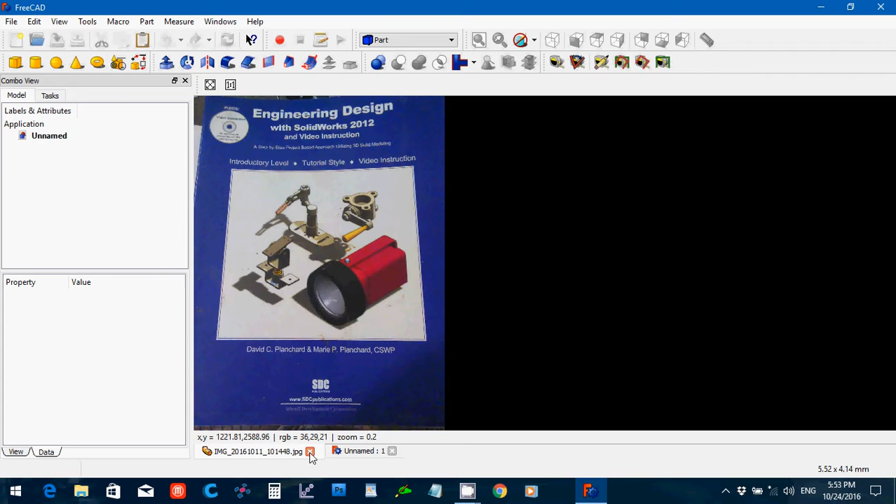In this part of the exercise, part 2, we're going to create the rod. I made a small change to it due to a small change I made to the plate in part 1. So I'm going to start off by going over to part design. I'm going to create a sketch on the XZ plane, say OK.

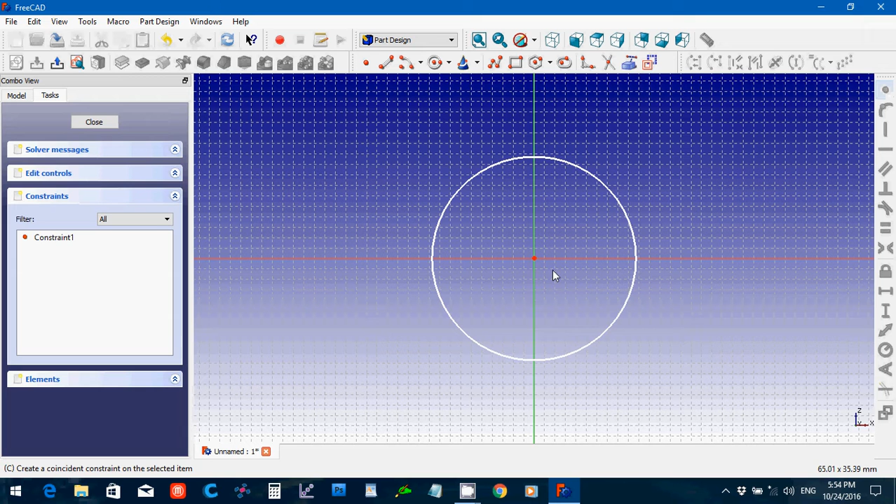I'm going to start off by just creating a circle. Zoom in. I want to make sure that circle is right on the origin. We're going to set the radius here to 5, say OK, and we're going to close that.

We're going to pad that. It's going to be 99 millimeters, because the original dimension was 100, but I'm going to be adding a 1 millimeter part to the other end. So 99, say OK.

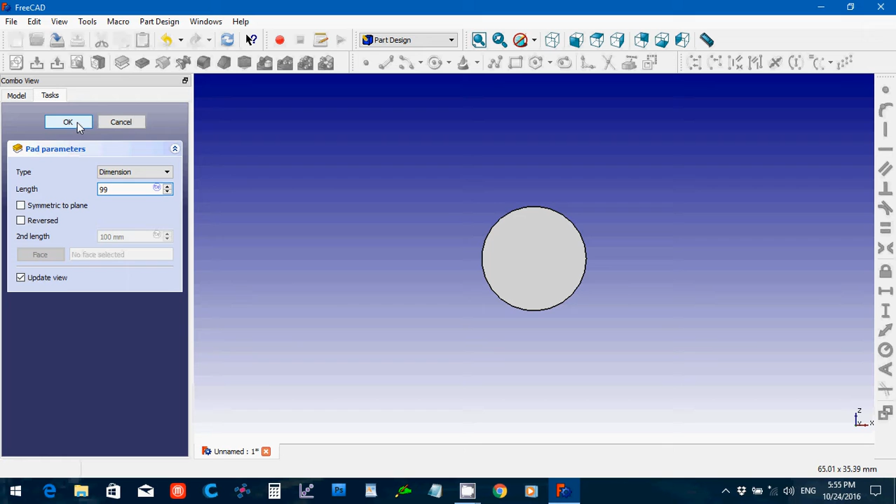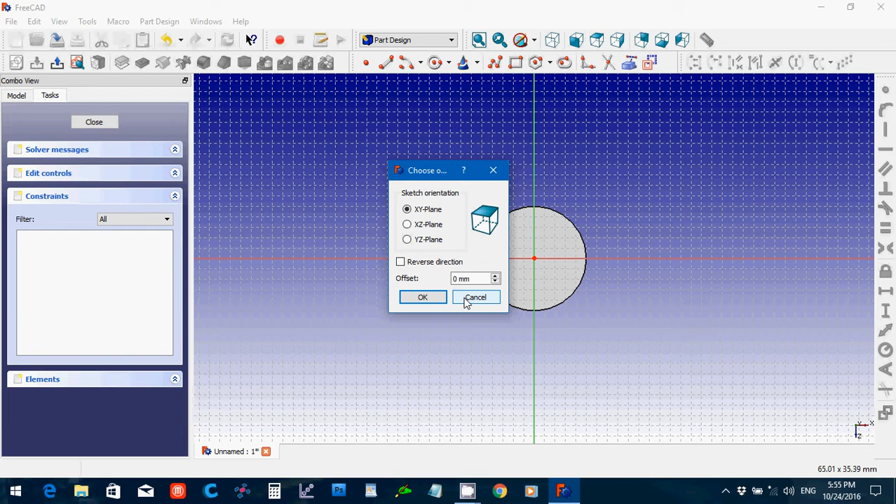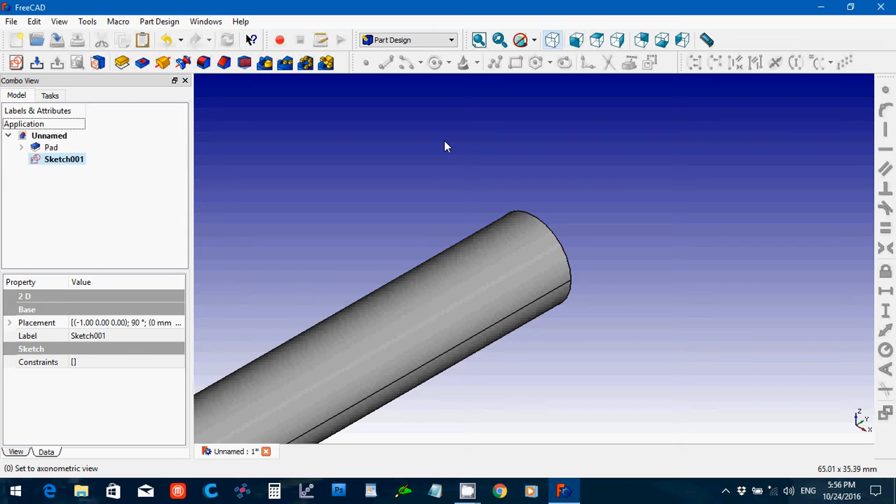I'm going to select this, I'm going to create a sketch on it. I just flipped it around somehow. Cancel that, cancel. I don't know what's going on. Let me get back to where I'm at. I don't know which view I'm at. Okay, come on, I was trying to select that one.

Okay, and we're going to draw a line. Make sure it's selected, that line again, and it's going to be 6 millimeters. You want to make sure that it's symmetric. Bring it up so that it's touching there.

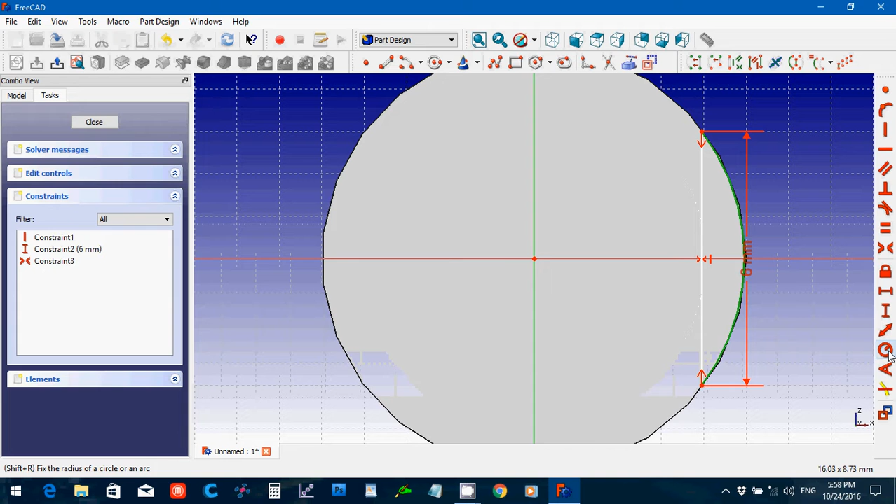And then we're going to create an arc, and we're going to set that radius to 5. Make sure that these are connected. Come on, sorry, I don't know why my computer is so unresponsive when it's running this.

I want to make sure that it's slightly outside the line there, and say close. We're going to use that sketch to pocket, and we're going to pocket that 15 millimeters, say OK.

So now I've got a sketch still there, and then I'm going to select this again, create another sketch, and create a circle, 2 circles actually.

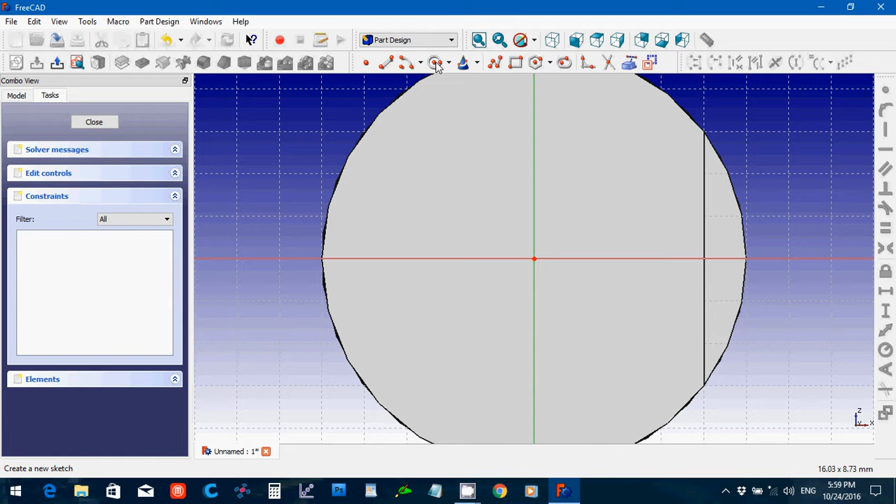Make sure that they're all pinned to the center, and then set the radiuses: outer one to 3.5 and the inner one to 1.5.

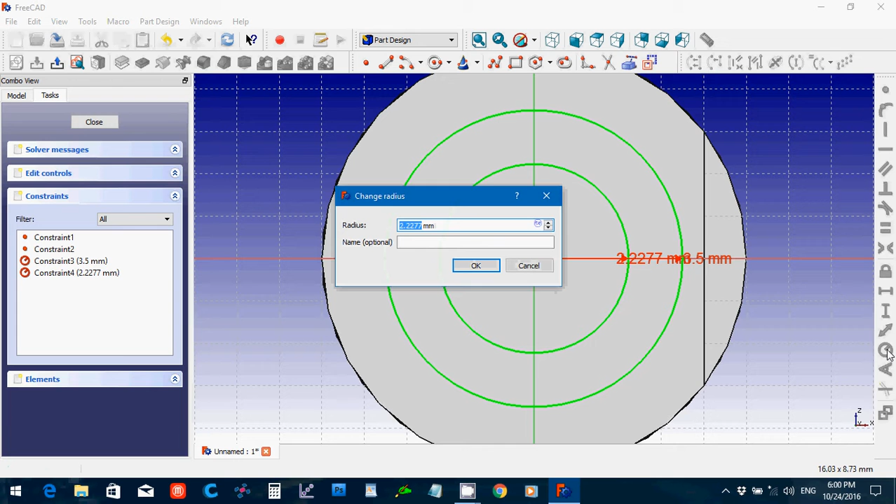Now you may be wondering why, whoops. The radiuses on the other part were 2 millimeters, or the diameter was 4 millimeters. But you're setting these to 1.5 mostly because if you had someone doing this as machine shop type work, they would drill a smaller hole and then tap it. This book is using almost a whole millimeter, but I'm sure less than that is actually needed as far as tolerance, but we're going to go by what the book says.

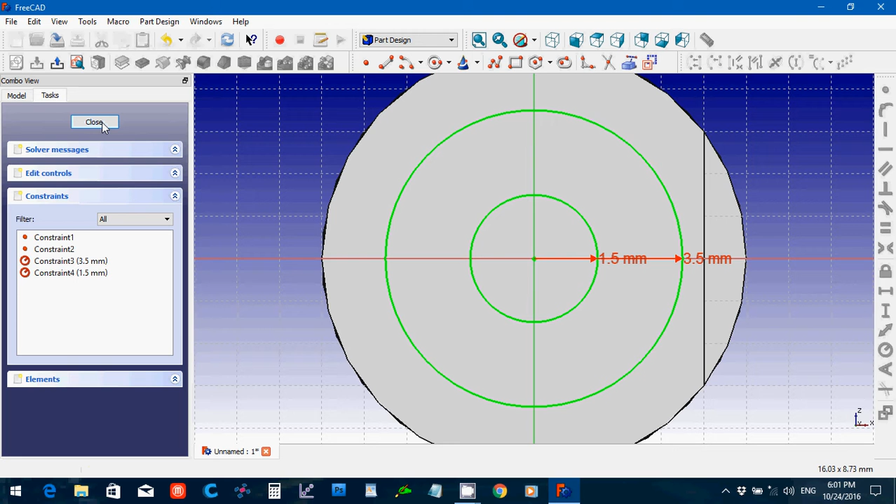And then we're going to pad that, that's going to be 10 millimeters. I'm going to select this edge here, I'm going to chamfer it one. Say OK.

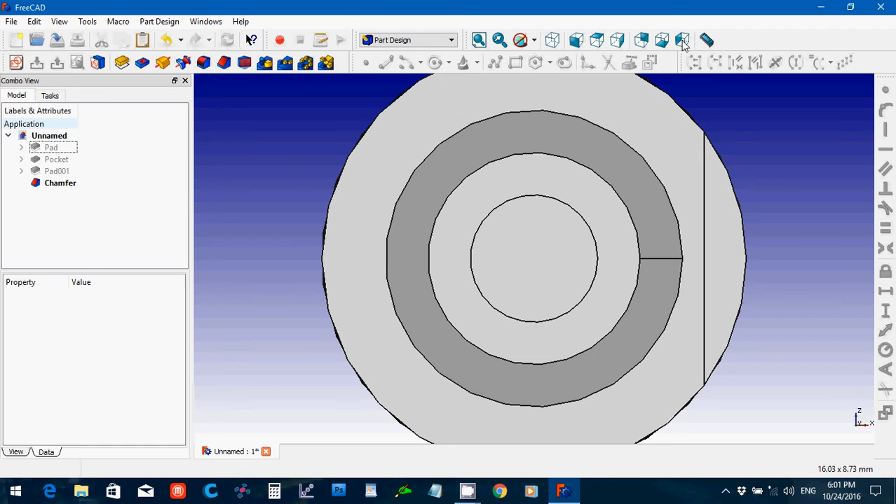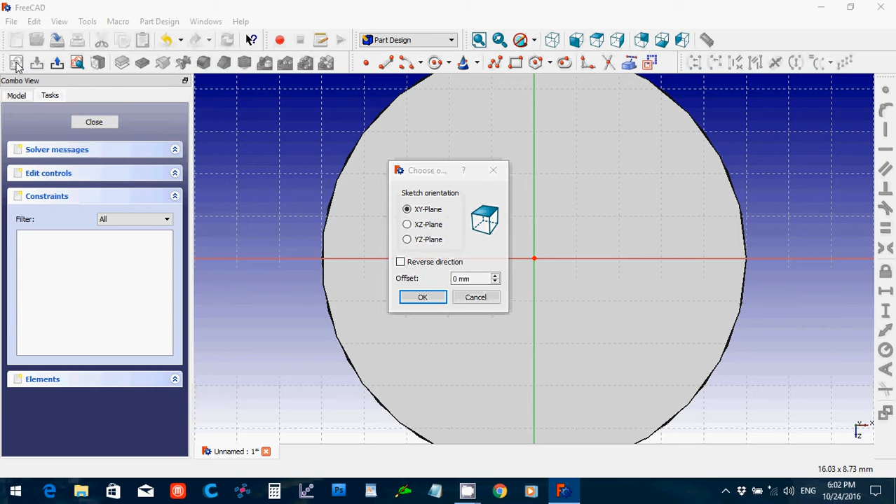And then I want to switch around so I'm looking at it, this end. And I'm going to create another sketch. No, I want it on that sketch. Why does it keep doing that? Sorry, I don't know why it's not selecting. I don't want this. Okay.

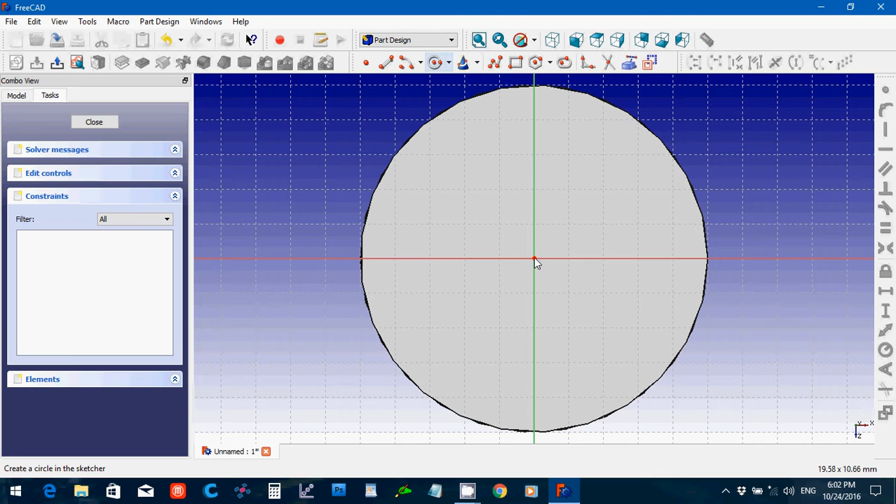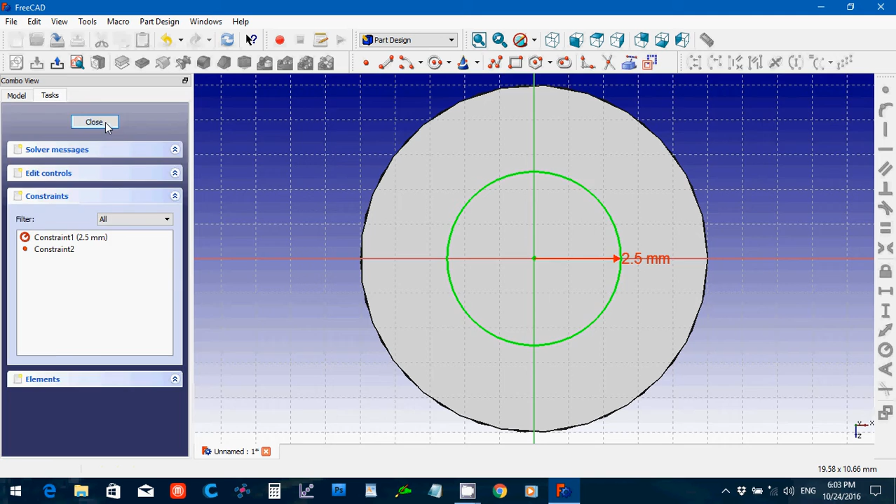Okay, creating a circle. Set the radius of that circle to 2.5. Make sure that it's in the center. Close. And then we're going to pad that 1mm.

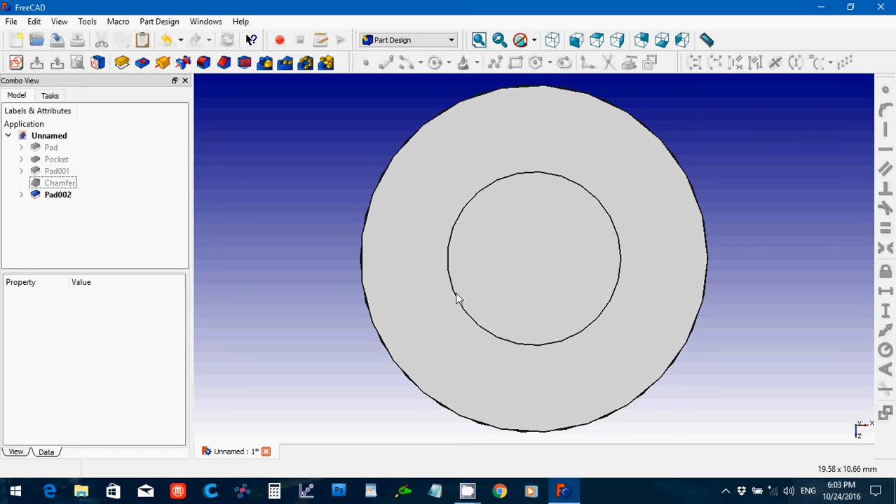I'm going to take and chamfer that, but I'm going to just go 0.75. Say okay.

Then I'm going to select this face right there, create a sketch. Hopefully it's where it's supposed to be. That's going to be at 1.5.

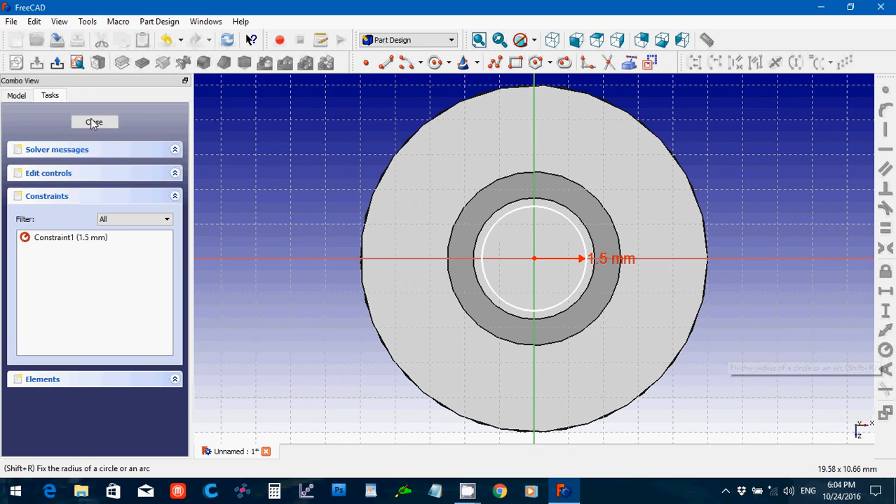And this time we're going to pocket, and we're going to say 10. Say okay.

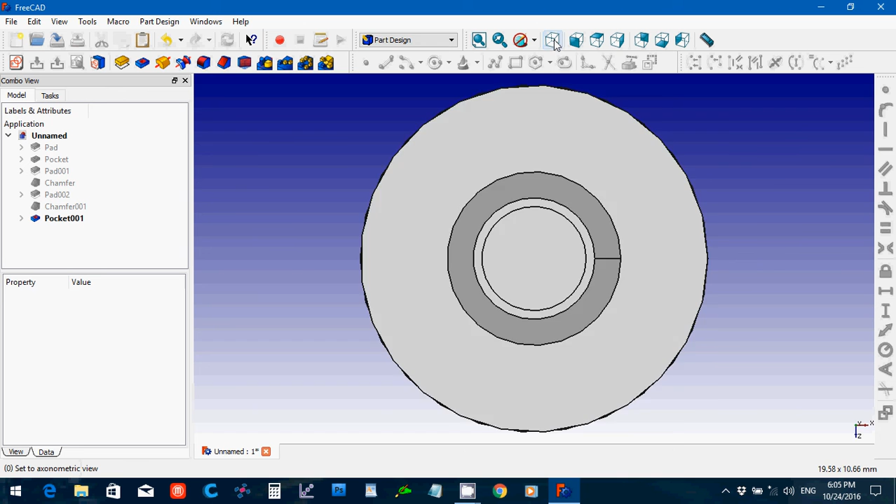So that's our shaft, woohoo! So that rod, that was on, or began on page 1-68 of that book.